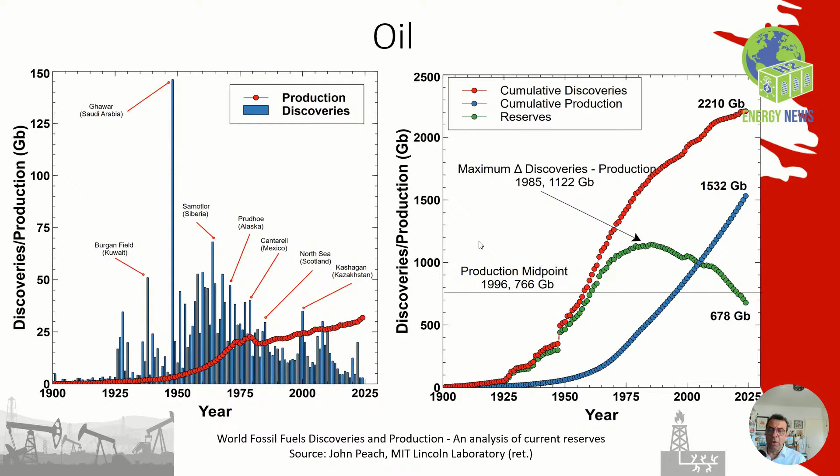In 2016, HSBC did a study, and they found that 81% of existing oil reserves are being annually depleted at a rate between 5 and 15%. So while we're on this plateau, in the background, our reserves are depleting fast and we're not discovering new ones.

The message here is we should seriously think about the after-oil plan, the after-fossil-fuels plan, because there will come a point when oil leaves us, and if it takes 20 years to construct the infrastructure required to replace the oil and petroleum system, we really need to get on with it.

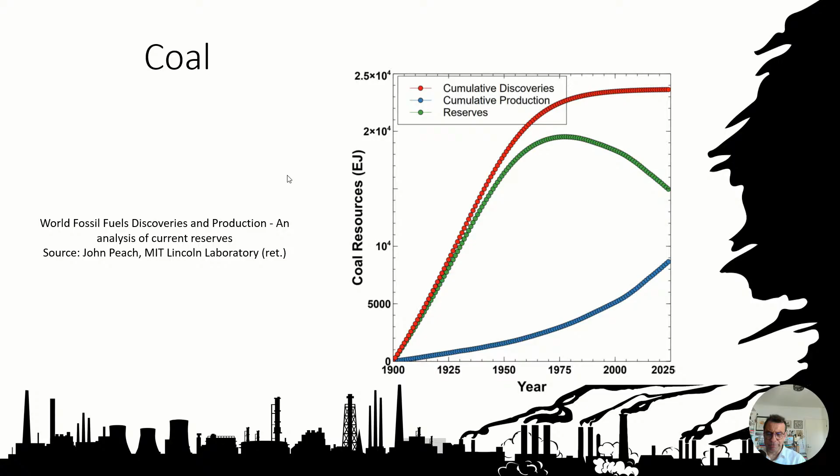The power grid, especially in the United States, is very fragile. It is very complex, and it has built over time in layer upon layer upon layer of complexity. It has almost no resilience at all, and it is an industrial technological marvel that it operates as reliably as it does. Most people don't understand the work that is done to keep that situation going.

So, three quick case studies. 4th of September, Alamosa County, Colorado, in the United States. A very large cloud bank moved in, big storm. That resulted in an 81% drop in electricity for the solar farm that served that whole region.

81%. And they had to source that power from somewhere else, and it was a power shortfall, and they didn't know what to do.

5th of January, Columbia River Gorge, USA. The wind stopped blowing and did not start again for 3 weeks.

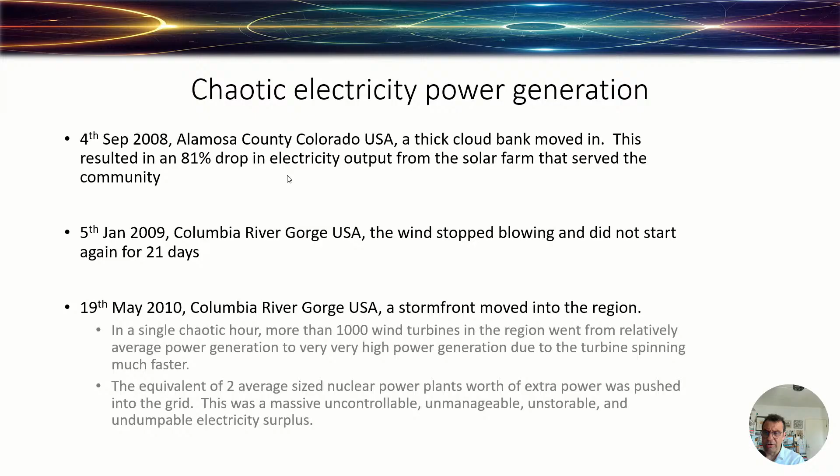Here is that data. So what you're seeing here is the yellow line is demand, and everything else was production. So they had far more electricity than they actually needed. And the problem was solar.

They had more solar, but the solar power that comes in is highly variable, not just in voltage and current, but frequency. The frequency of the power and the VAR frequencies were all very chaotic and outside specification. And not 1, but 2 trip commands came out, and the whole grid just had to shut down, and that set off a cascade, and the entire region shut down.

So the idea that we could have a 3 times build out of solar and wind, and that would negate the need for a storage buffer, was put to rest with this case study. You can have too much power of the wrong frequency, and because we are now subject to the weather, it's all very chaotic.

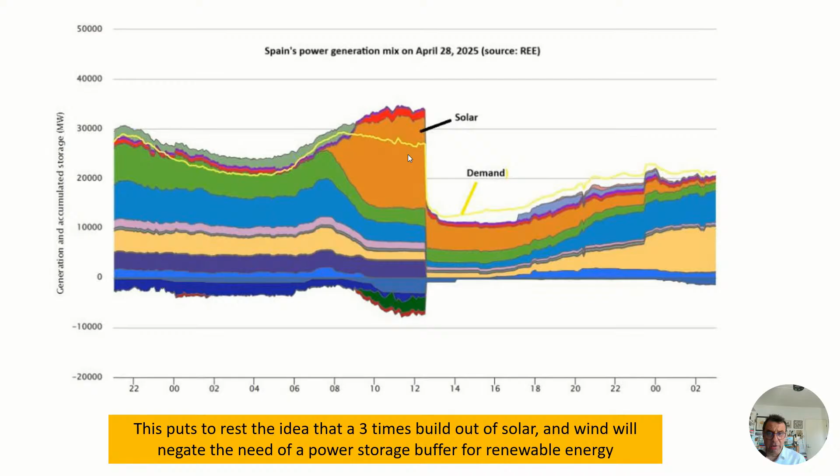Wind, it turns out, is very variable, highly variable, more so than solar. This was a case study I've shown a couple of times. This is Sweden, Denmark, UK, France, and Germany, their wind power all put together. What we're seeing is when one region has a peak, the others do too, but when there's a wind lull, that also extends over a wide area. So you can't use the power from, say, Germany to balance France, or UK to balance Denmark, because everyone's got the same problem at the same time. And there's variations of up to 48%, which are massive swings.

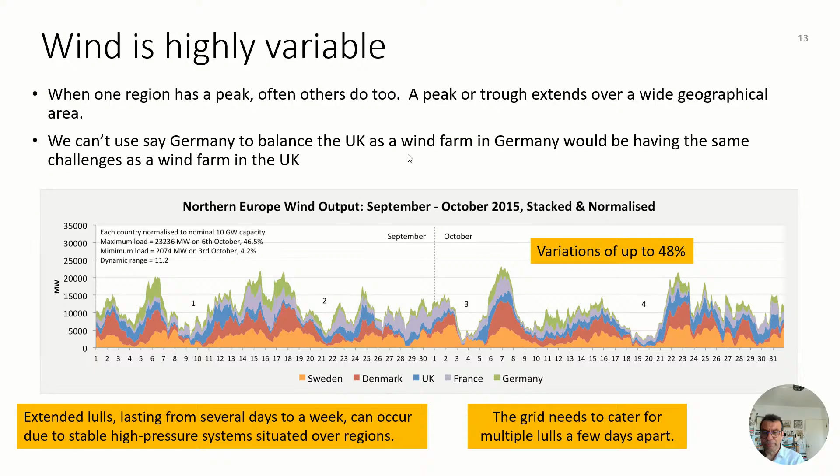This was the 13-day power drop-off in Texas in 2021. In the same year, they had 2 power dropouts, one in winter, one in summer. This was winter - a really severe cold storm came through and a lot of equipment just froze, causing power disruptions. This graph also shows how variable wind is day-to-day, but you see that variation on a minute-to-minute basis too. It really is quite variable. Power generation fell by over 50% at peak times, and the grid struggled to meet demand.

So what they found was, getting a black start going, it was much easier to get gas-fired power generation systems going than renewables. That was the outcome of that era. Every time this sort of thing happens, we all learn something - we all learn what we need to do.

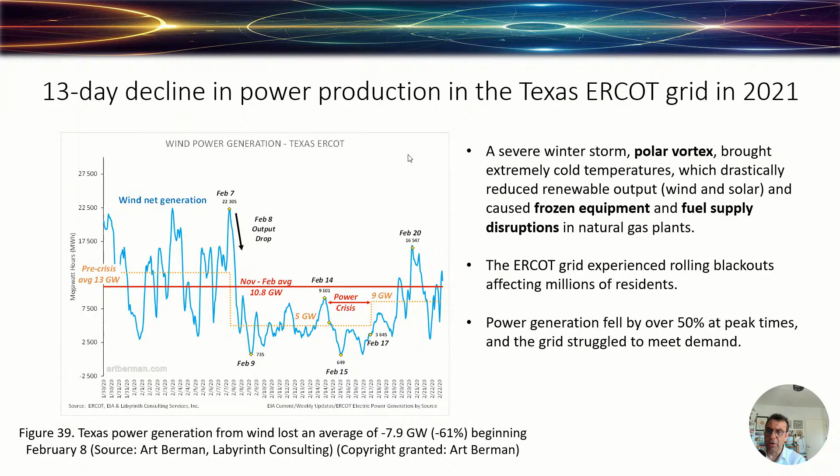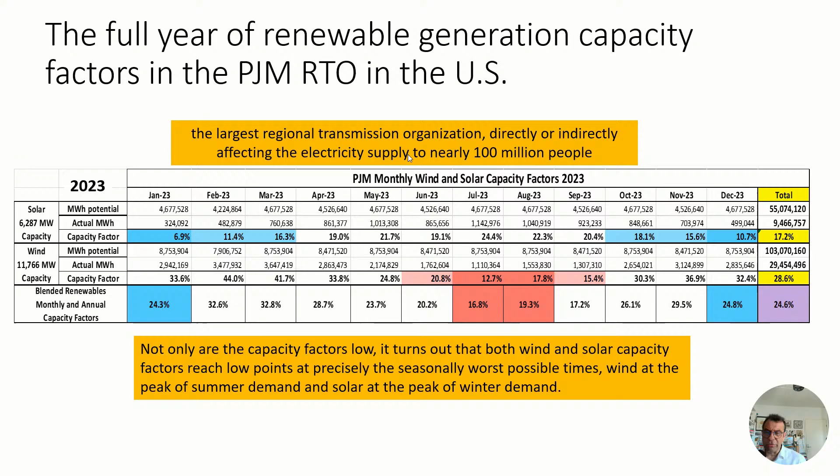So the conventional thinking says 5 to 7 hours of storage. That doesn't get us through winter.

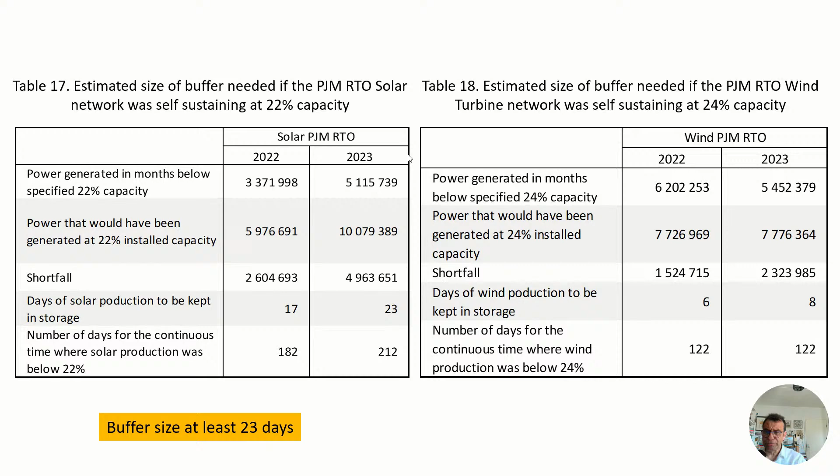Here is that same data, but now the chart on the left looks at wind and solar, as in what power was actually produced, and when. What was the total power produced from these two grids over that time? You're seeing quite a variation, and you're also seeing wind is far more variable than solar - solar is a bit more predictable. So the question is: would it be possible for wind and solar to buffer each other? When the sun doesn't shine, the wind is blowing somewhere - will that help us?

So I normalized the data in the chart on the right to show the power production - how many hours of production per megawatt of installed capacity. What you're seeing here is wind - those columns would have to be close to a flat line if this was to work, and you're still seeing quite a bit of variation. Wind is far more variable, even at the per-megawatt scale, and solar was far more predictable, even though we had less shortfall. There was up to a 29% variation across that when it should be a flat line.

So can wind and solar buffer each other, making stationary storage buffer obsolete? I don't believe so, and that's what this graph is telling me. Also, some of the technology required to make that grid stable and reliable doesn't exist yet, but it could be developed - as far as I know, it hasn't been done yet. This can't work without large amounts of redundancies at this stage.

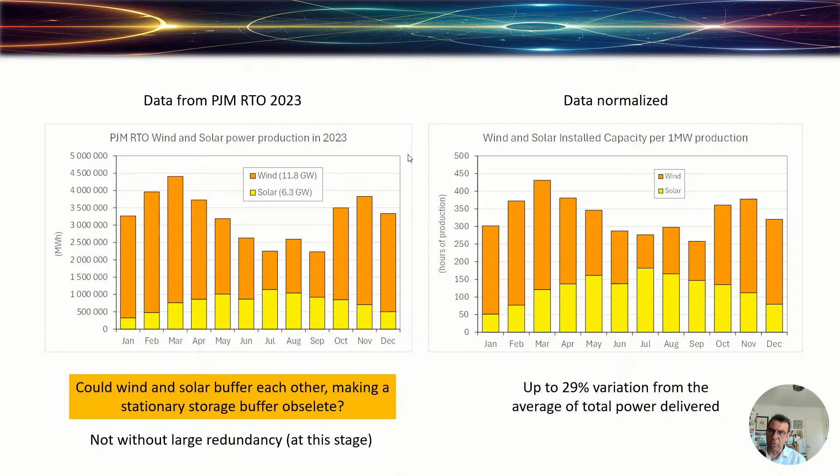So, moving on - this is the work I did in Hawaii. If Hawaii was to phase out fossil fuels, what would that look like? We took data from the NREL site that's actually collecting solar radiance data on the island of Oahu in Hawaii. We then got classifications across the year of what each of the different setups produced - we had 5 different types of solar power setups.

So, okay, what were they? We had domestic housing, like a single-family rental - essentially a domestic house - commercial rooftop, parking spaces, then the arrays: fixed tilt ground mount and single-axis tracker ground mount. So what was their production in terms of kilowatt hours per installed kilowatt across each month for the state of Hawaii? We came up with this data here in the simulation.

Over a 12-month period, we did see a big peak and decline. Now, if this was a standalone system, the dotted line would represent the average production, which would be the contract. So anything above that line could be captured and stored, and anything below that line would have to be brought in from somewhere else.

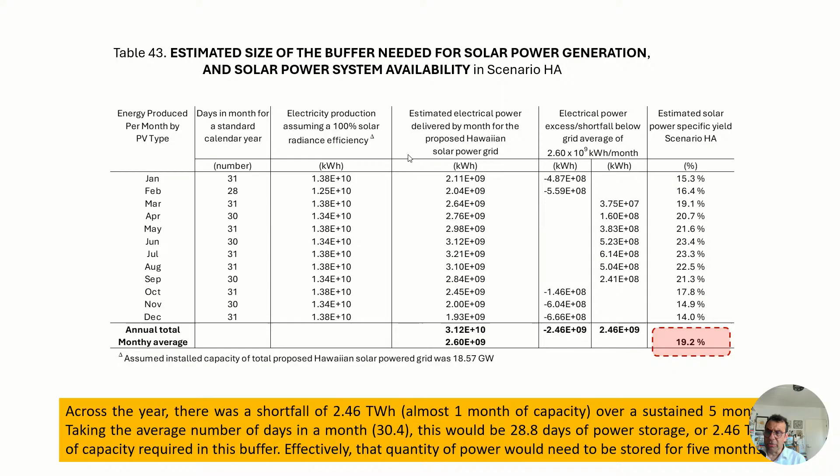This is to show that the idea that 5 to 7 hours is what conventional thinking believes is simply not enough. So the green transition can't be resourced. Wind and solar are highly variable. We're dependent on the weather, which is a chaotic system we can't predict. So a power storage buffer is needed in some form to get through the day-night cycle, to get through the seasonal differences, winter versus summer, and to get through the wind lulls up to 3 weeks. The 3 times build out of wind and solar plus a 6-hour buffer won't work.

To use wind and solar to buffer each other, well, some tech needs to be developed. That's not the end of the world. But in the renewable energy sector, a dunkelflaute, or dark doldrums, or dark wind lull, is a period of time in which little or no energy can be generated with wind or solar. In meteorology this is known as an anticyclonic gloom, which means the industry's got a term for that.

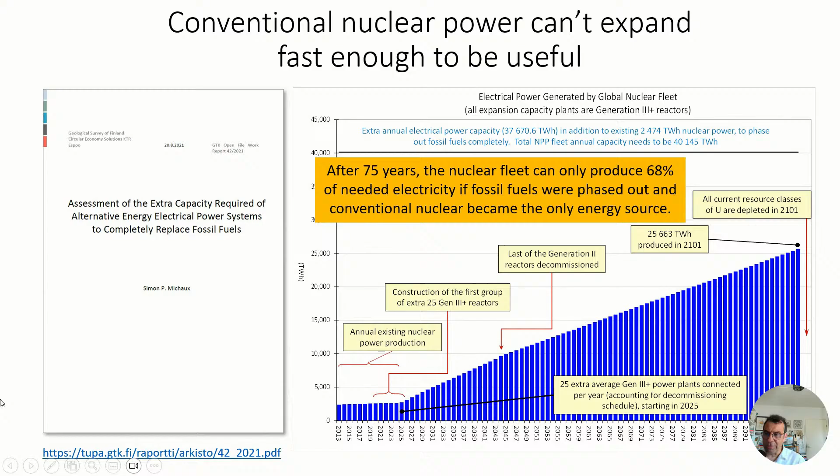So what this is saying, if nuclear was to be an acceptable system, it would have to step in and be viable to supply the vast majority of our energy in 5 to 10 years if we're to make this happen. 75 years, that's not going to happen. We can't expand fast enough to be useful. I'm a supporter of nuclear, but it needs to evolve into something else.

The planet can't produce enough biofuels. This is also the 2021 report. If we were to actually replace gasoline consumption and diesel consumption for the year 2018, and if we were to grow diesel fuel and corn fuel at the same time, the amount of land that we would need is on the left. That amount of land far exceeds any crop arable land that we have, and it's comparable to the amount of forest we have on the planet. The chart on the right is the amount of fresh water we would need, compared to the existing annual freshwater withdrawal. So the planet cannot produce enough biomass to produce enough biofuels for a straight substitution.

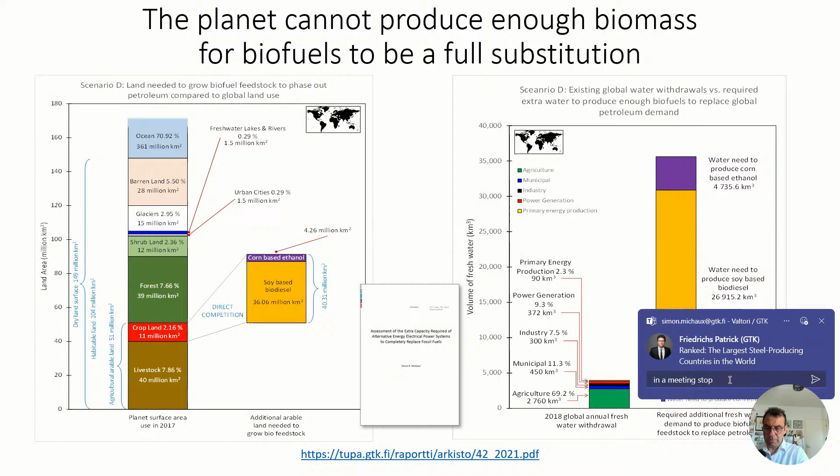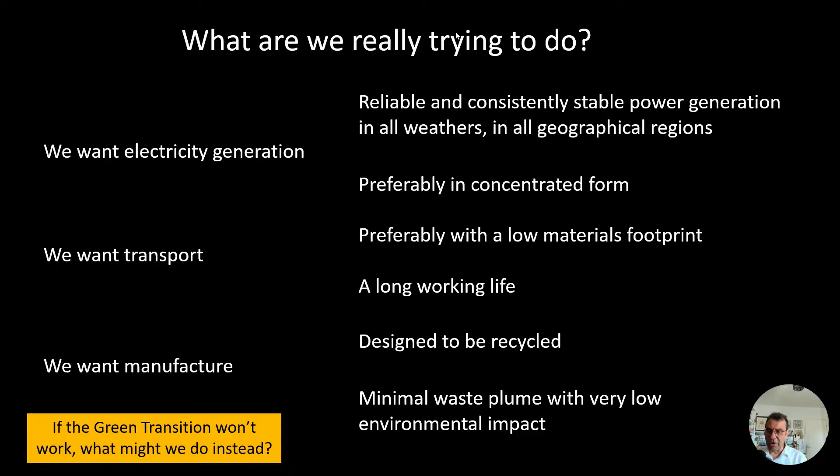So what are we really trying to do here? We want electricity generation. We want transport. We want manufacture. So we want reliable and consistently stable power generation in all weathers, in all geographical regions, preferably in concentrated form, preferably with a low materials footprint, a long working life, and designed to be recycled, with minimal waste plume and a very low environmental impact.

So I propose the purple transition, the resource balanced economy, which at its heart is an evolved and reinvented resource management system.

At the heart of it is thorium-fueled generation for small modular reactors. There are now two technologies on the books for this: one is the molten salt reactor, the other is the pebble bed reactor.

More on that later. Electric vehicles, but powered by different chemistries, non-lithium chemistry, for anything short range, less than 100 kilometers - that's what we need. Combustion of iron powder as the thermal fuel, which will be a replacement for coal.

Pyrolysis of human sewage: we take human sewage and heat it without oxygen, and that becomes syngas. That syngas can be used as domestic cooking fuel, or we can recycle the combusted iron powder - it's a recyclable fuel. Ammonia-fueled internal combustion engine technology for our long-range transport.

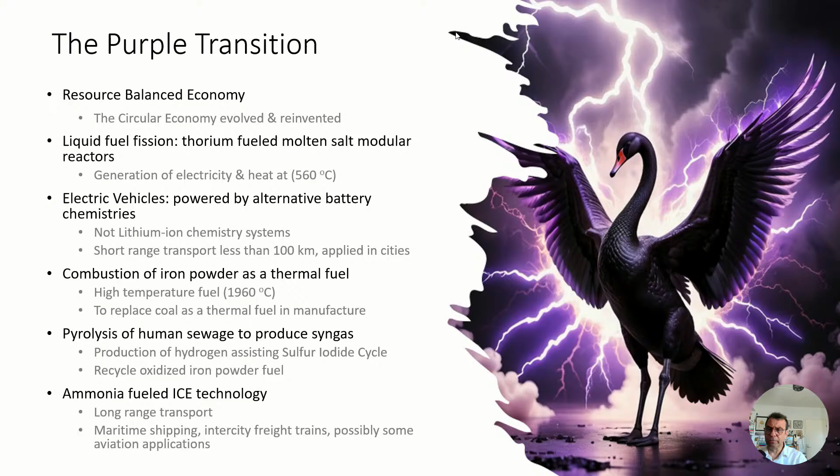There are a couple of other things as well. For energy systems, we want a non-fossil fuel paradigm that allows decentralization, simplification, and contraction in size of the industrial sector. So this is the molten salt burner.

This is the molten salt burner. The thorium takes the form of a salt, thorium and fluoride together. It's not radioactive at the beginning, and its hazard sheet says don't get it wet so it doesn't dissolve. It's put into the reactor, and they have a neutron source to bombard it, and some of the thorium is transmuted.

It's transmuted into uranium-233. The uranium-233 is hot, it melts the salt, it turns into a liquid, and then it moves around the circuit, exchanging heat. That heat is then used to turn water into steam, which turns a generator, which generates electrical energy.

So this thing's already liquid. The fuel can be exchanged and cleaned while it's still operating - it doesn't need to shut down. If it gets too hot, you've got a freeze plug and the fuel just drains out of the reactor into separate dump tanks, and can be dealt with elsewhere.

Also, through a process called the Doppler cascade, if it gets too hot, the neutron economy will cascade over the top of itself and shut down. So there's not one, but two things to stop it from melting down. This is inherently safe, and it's not going to produce something like a Chernobyl or Fukushima accident.

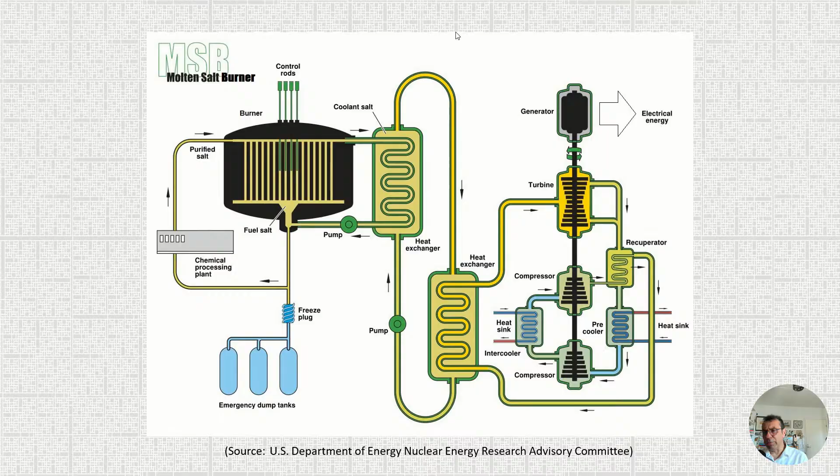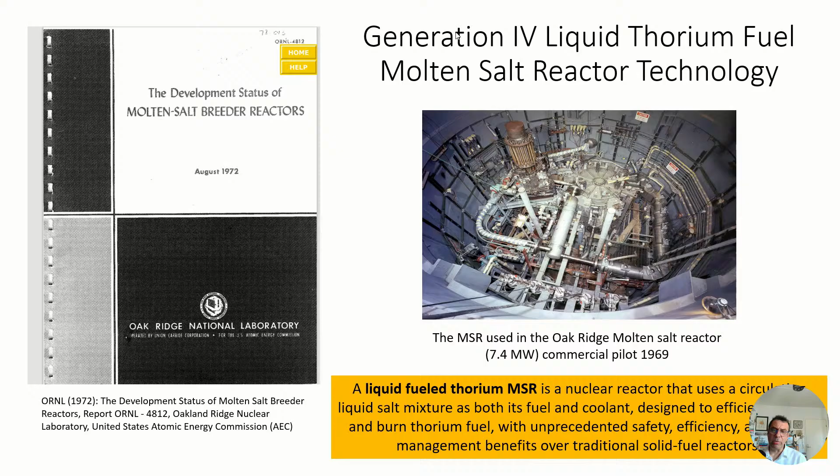In 1972, they had a report where molten salt breeder reactors came in, and this report showed it worked. They were asking for funding to actually extend it. This is the picture of their system that they were working on. It was 7.4 megawatts, and it had 6,000 hours of uninterrupted power generation without a problem.

China is actually already commercially using this power. The liquid fuel thorium reactor of 2 megawatt size is in the Gobi Desert and has been commercially selling power since 2022. So this is not a theory - the technology is out there running, and it's in the commercial world already.

There are multiple systems in China. I'm going to present you with two of them. I went to Europe, Copenhagen. Copenhagen Atomics is making a factory that will produce these, and they'll be producing at this stage by 2028, if all goes well. Their system is 100 megawatts of thermal heat, or 40 megawatts of electricity.

It's a modular system where they can stitch as many of these things together to construct a range of power capacities. Each reactor is the size of a 40-foot shipping container. Electricity will be sold at a projected 2 cents a kilowatt hour.

One gram of thorium or uranium produces 24 megawatt hours of thermal energy. So a plant producing, say, 1 gigawatt of electricity will consume 800 kilograms of thorium-232 in metal salt form each year.

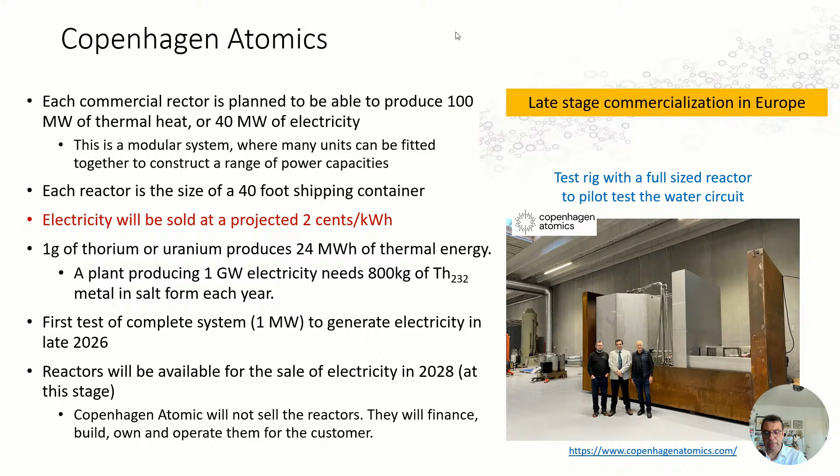It's the size of a shipping container and arrives on a truck. When it's installed, they'll mount 50 years of fuel in it, and they have a 5-year maintenance cycle where they come in and strip out corroded parts and maybe even clean a bit of the fuel. Then when the reactor is done, they take it away and replace it with another one. That system produces 40 megawatts of electricity.

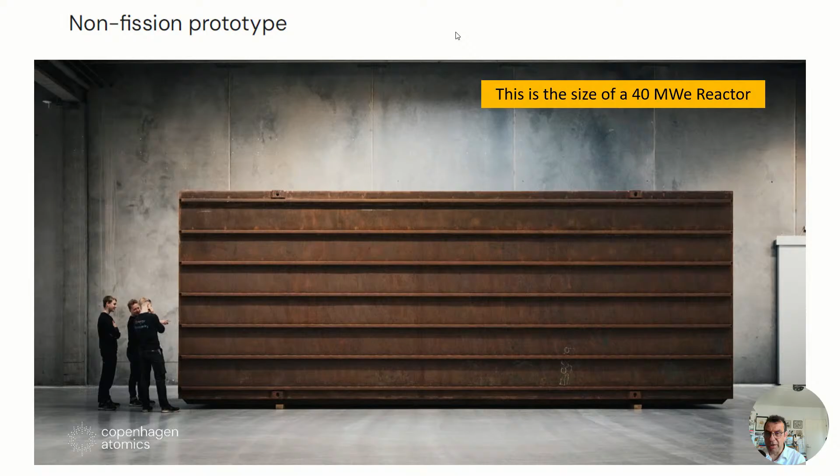It's an isotope of U-235, which naturally is about 0.7% of natural uranium. The enrichment process takes it to about 4%. So each of your fuel rods has pellets in it with only 4% of useful fuel. So when that's depleted, they've got to take it out and put it in storage. The vast majority of what goes in is not useful.

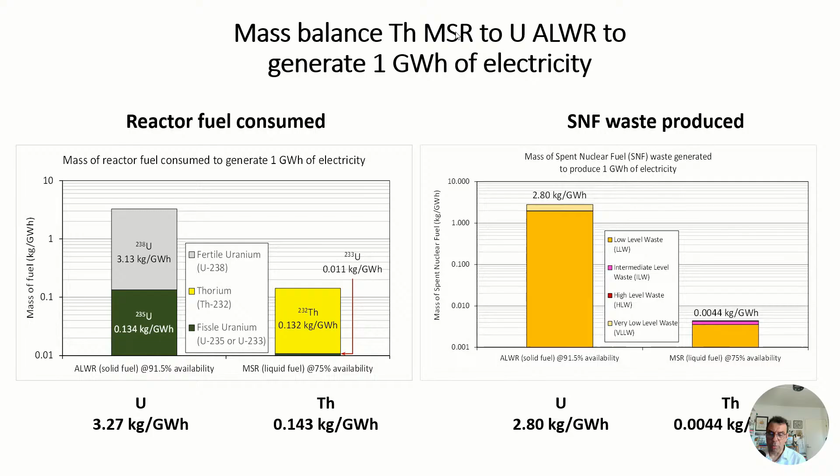For thorium, every single atom of thorium is used. It's transmuted to U-233 and it goes through the process. So reactor fuel on the left, spent nuclear fuel on the right. We've got an order of magnitude difference in the amount of spent waste. So this is a much simpler system.

There's also the problem of shielding. The stuff on the outside will shield the stuff on the inside. So it's not a very efficient use of fuel.

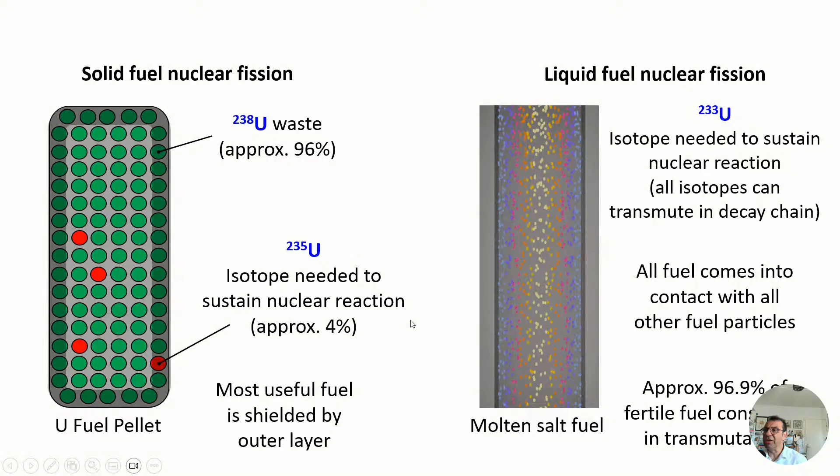So if we're in the situation here where fuel's moving around and there is no shielding, it doesn't matter if fuel stays in there a bit longer than normal—it doesn't actually stop anything. So what this means is we can actually, over time, put small quantities of spent nuclear fuel into a molten salt reactor and turn it into useful fuel.

This is a solution for the nuclear Achilles heel of what to do with the spent nuclear fuel. This is such an opportunity.

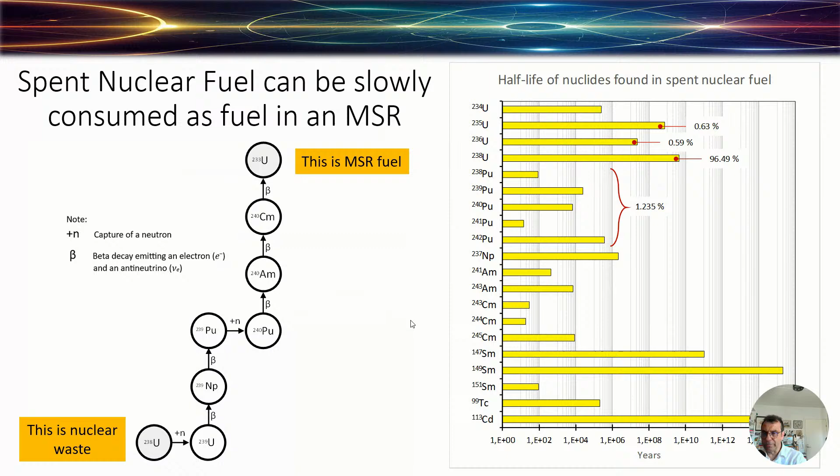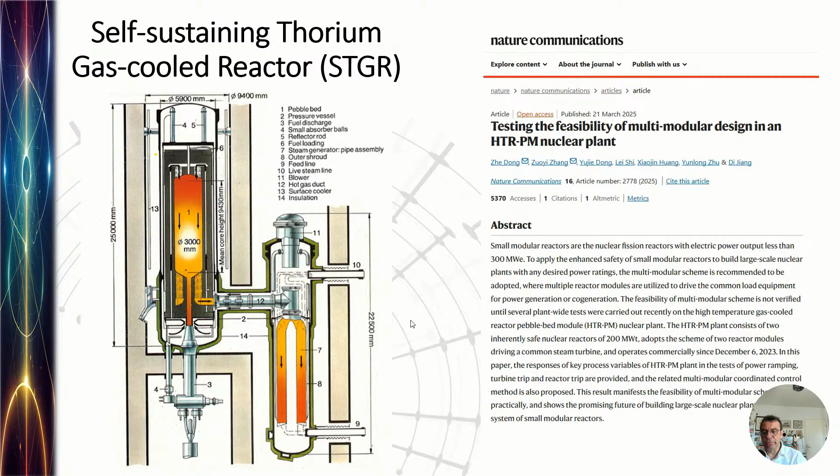So what this is, you've got your fuel. Your fuel is like, say, 0.5 millimeter in size of uranium or thorium. It works for either. We coat it with a series of layers, and it becomes what's called a triso fuel element. So they coat it, and the final pebble is about 60 millimeters in diameter.

This is important because solid fuel thorium, when they tried it in India, it worked, but the problem was the fuel particles got corroded on the surface, and they had to take the fuel pellets out and dip them in acid while they were still very radioactive, then put them back into the reactor. While it was doable, it wasn't worth the hassle, because uranium was a better fuel when it actually came down to it. This solves that problem, though—the surface doesn't corrode, and all the thorium can actually be consumed as fuel. So it's a very simple system.

It's a tall cylinder. You have a pebble bed with the pebbles.

Pebbles are dropped in the top, and over time they're used. Out of the bottom they take them out every now and then and examine each pebble to see if it's actually been used or not. If it still has useful thorium or uranium in it, it's put back in. If not, it's sent off for recycling.

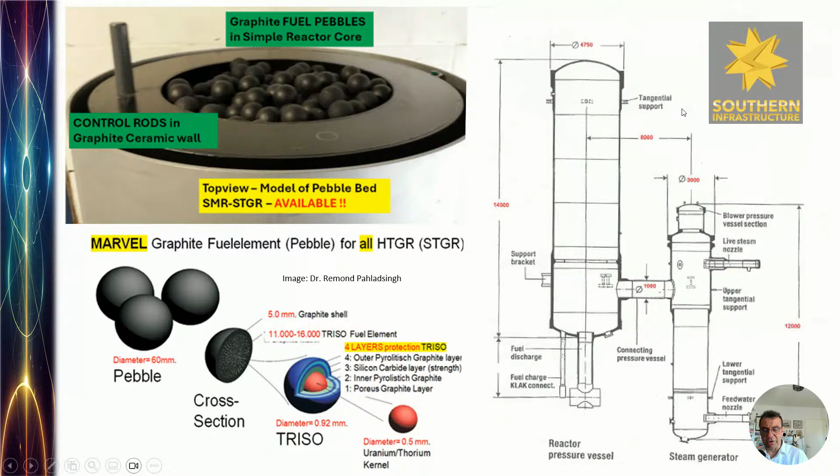So that 900 degrees turns out to be a threshold, and all sorts of things are possible. The sulfur iodine hydrogen production process requires 900 degrees, and it was previously rejected because supplying that kind of heat was a problem. The other thing that interests me here is these are small enough to be deployed in a shipping container, and they've got a 24-month factory build.

This system is safer again than the MSR. With the MSR, you've got a hot liquid at high pressure moving around the system - if you have a crack in a pipe, you've got hot liquid spraying out of that crack. There's a lot of engineering done to prevent that, but this is just a pebble bed. There's nothing to leak, nothing to melt down. It's inherently safe.

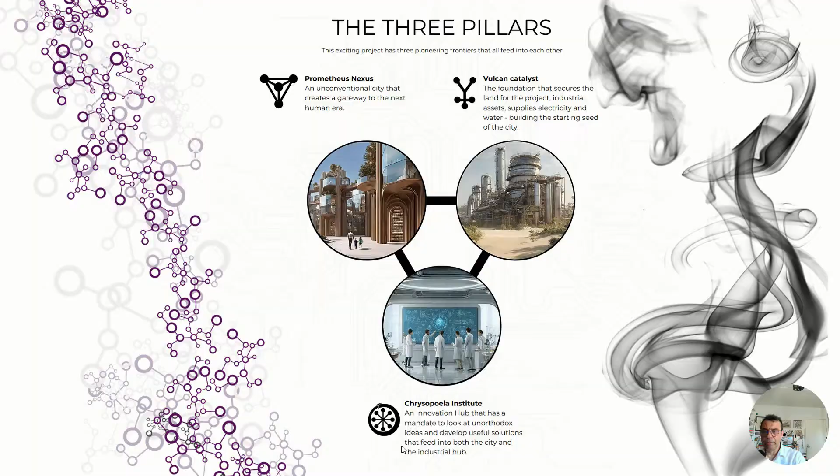What we're trying to do is inspired by Jacques Fresco's ideas. He founded the Venus Project, which is still running at thevenusproject.com - I recommend people go have a look at it. I read his writings, never met the man, but he was clearly a genius. I'm paraphrasing, I listened to a number of his presentations of what the future could be.

So what is our paradigm behind it all? If we were to design a human settlement, let's call it a city, and use the best science has to offer, but also optimize the whole city to the well-being and quality of life for the people who lived there, what would that look like?

When I was researching the energy grid and its history, it was very apparent it evolved over time in layer upon layer, a Frankenstein system that was terribly inefficient, but people were completely helpless in doing anything about it. But if they were to design an energy grid from scratch, build the whole thing whole cloth in a greenfield context, it would be very different.

I think this is the case with all our technology, including how we design our cities. So this is a new paradigm for how we might live - an evolution of the existing industrial society, powered by an unorthodox, mature energy source, operated to a new resources management paradigm, which is what I'm now proposing. A more responsible relationship with the planetary environment is what we're after.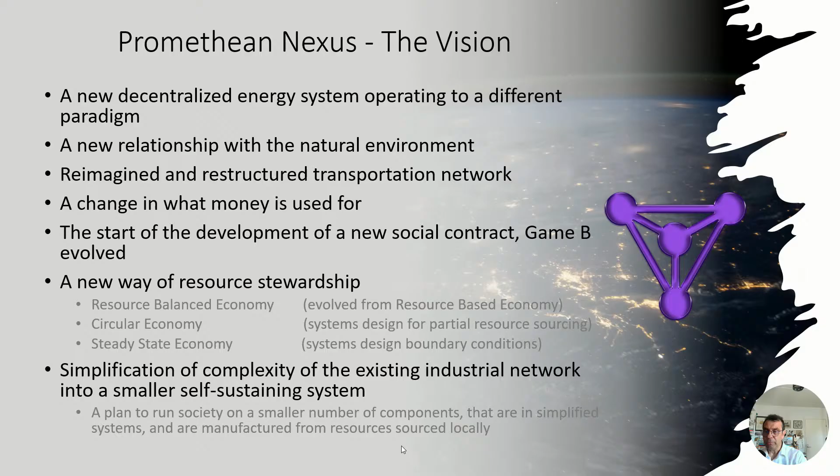So we want to develop a comprehensive plan for social reclamation in which human beings, technology, and nature will be able to coexist in a long-term, sustainable state of dynamic equilibrium. That's another Jacques Fresco quote. I would have liked to have met that man.

And that brings us to Vulcan Catalyst - this is the other aspect of this project. It's an industrial project that will raise revenue through the sale of cheap electricity, cheap diesel fuel, and the production of graphene products. We want a self-sufficient industrial innovation hub. We're going to produce electricity

using thorium-fueled MSRs, but also thorium small modular reactors, and possibly a uranium-fueled system as well, in what I call reactor park. More on that later.

As we're generating that electricity, we are taking water from the sea. That's important because every region we look at now has possible drinking water shortages, or at least the area I'm looking at in particular. If we can work out a way of having all our water needs taken from the sea, we're not in competition with the locals for their own drinking water at a time when there's not quite enough to go around. I'm talking about the coast of South America.

So I'm going to talk about this later, but we take water from the sea, we desalinate it using heat from the reactors, put it through the turbines, and then we capture that steam, and that's our drinking water.

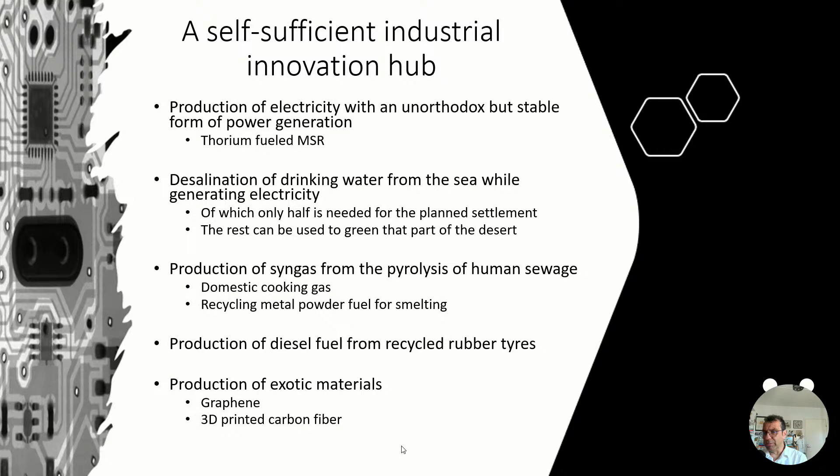Approach a locally positioned company, like a mine site, that needs a large amount of energy to function. A mine site needs something like 50 megawatts of power supplied sustainably, and they're having real troubles trying to do that with renewable power.

Get that corporation to request the local government to create what's called a regulation sandbox. In that sandbox, we will do a number of research actions. This will be a partnership between the corporation, Vulcan Catalyst, and the local regional government.

We want permission to construct and operate Generation 4 small modular reactors fueled by thorium and uranium. We also want permission to construct and trial innovative building materials like geopolymers.

Once we get that regulation sandbox, we set up Reactor Park. This will also help us secure the land. This will be part of the deal.

Once we get Reactor Park up and running, operate 3 to 5 small modular reactors of different technologies—thorium and uranium, but I prefer thorium.

Sell some of that electricity being generated and heat to the mine site. Use some of that electricity and heat to produce saleable products from primary and secondary sourced materials. This is actually using the principles of the circular economy. Can we valorize the waste streams around us? The answer is yes.

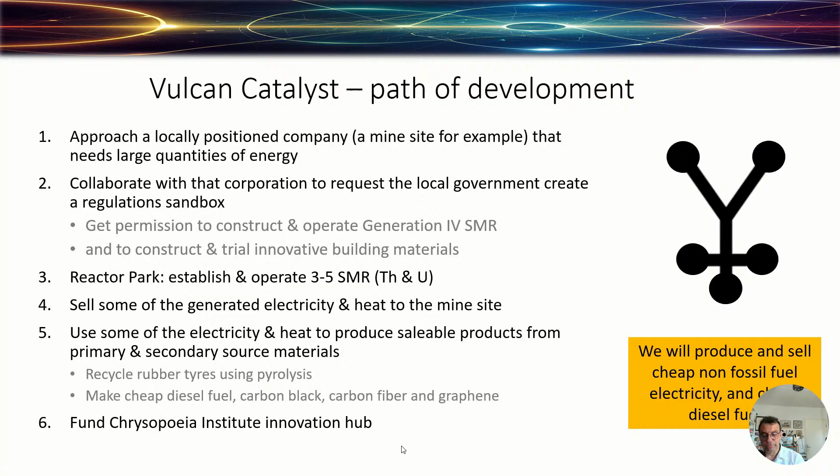As time goes on, we will start small with one or two operations. But as revenue comes in, parallel operations can start up in a revenue generation context. A new system can be brought online that will be able to generate revenue, and it will all balance.

But each of these systems are optimized where the outputs of one are fed in as inputs to another. This is actually what I call industrial permaculture. We end up with a constellation of maybe 30 pilot plants, industrial pilot plants, all optimized together as one large system.

And this is what I call industrial permaculture. More on that later.

What are the implications of a small industrial site that produces metals, possibly bioplastics and ceramics, possibly glass, from primary sources right next to it, and has state-of-the-art 3D printing, CNC, and pilot-scale smelting capability, where electricity, thermal heat, and potable water are available in quantities?

So what we've got here is, over time, we will build this. It will start small and simple, and as more money comes in, we'll develop more things. So the people who invest in this will get their money back over a 5 to 10 year time frame.

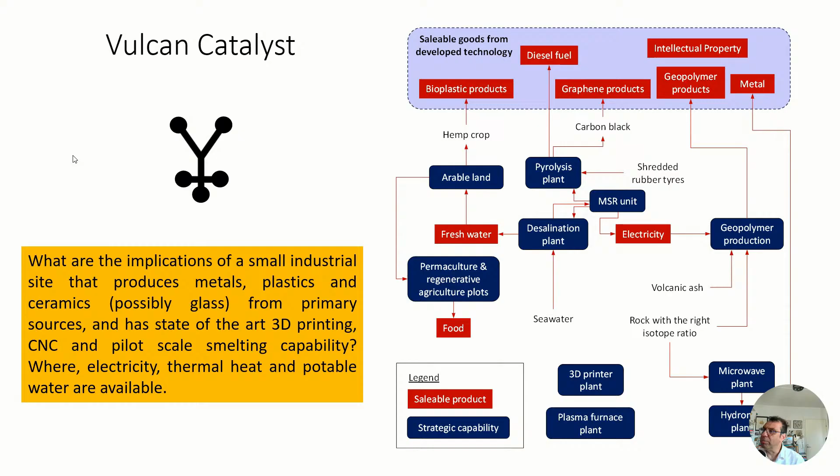There are two sites I'm interested in, one in Peru, one in Chile. I've approached government authorities in both areas. They both find the idea interesting, but there's a lot of discussion about whether it's practical or not.

So now we're talking about a mandate to look at unorthodox ideas. We need an innovation hub, and we need to test some of them at scale. What you're looking at here is the testing, the physical demonstration of a number of ideas and prototypes. We are not only going to make money out of this, we're going to demonstrate that they are real.

And that brings us to Chrysopoeia. So an innovation hub will be funded and founded as part of the Vulcan Catalyst project. This will be a hub with world-class capability that has a mandate to assess unorthodox ideas and then formalize them into a useful form. So we're going to take ideas across eight frontiers, and eventually we'll prototype some of those ideas into technology.

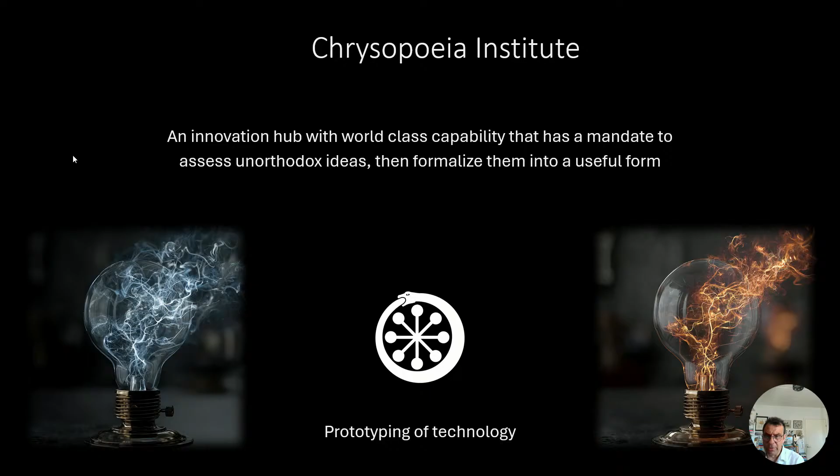So there'll be IP flowing off this hub. Some of that IP will be public domain, and some of it will be sold, depending on what it is. These are the frontiers: life systems and earth systems, social science, holistic health, energy in all its forms—particularly electromagnetic and electrostatic—nuclear atomic science, materials, manufacture, and also the understanding and use of AI.

Chrysopoeia will work on these frontiers to facilitate breakthroughs to allow our industrial society to transform into a more long-term sustainable system. Each of the things you see on the list is there for a reason. Once we have the breakthrough, we will use it. That's why it's there.

So this was the original mind map I put together. It's a little on the small side, sorry about that. Each division will facilitate a breakthrough in how we do things. Each division will have its own laboratory, sample storage, office, library, and database. All divisions will be organized so they can interact with other divisions.

One of the things I want to look at is energy—the true nature of energy. I think we only partially understand what energy actually is, and also what heat actually is. We have an understanding up to the point where we can predict what it will do, but we still have yet to get to the bottom of the rabbit hole.

So there's a whole lot of things, and there's an interface between energy systems and life systems. So I would like to look at that in some form.

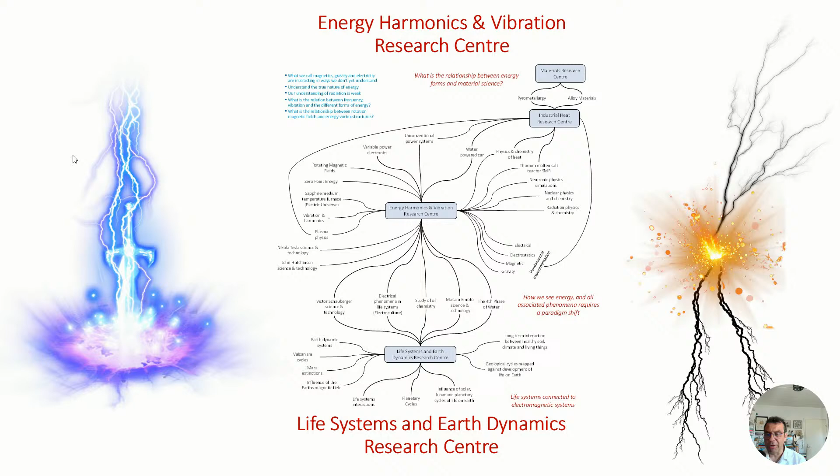There are three basic wings to the project. One is industrial evolution, the other is a new relationship with the environment, but the third is development of a new social contract.

We will found a game theory laboratory. Now, this will be asked to test a number of things. We will discuss and debate a whole series of ideas for a new social system, where we use money differently.

And I want that debate to get to the point where we can actually turn it into a practical system, then we can game theory it. I want it tested over a 500-year time frame to see what is required for a stable system to be in operation. And that's the job there.

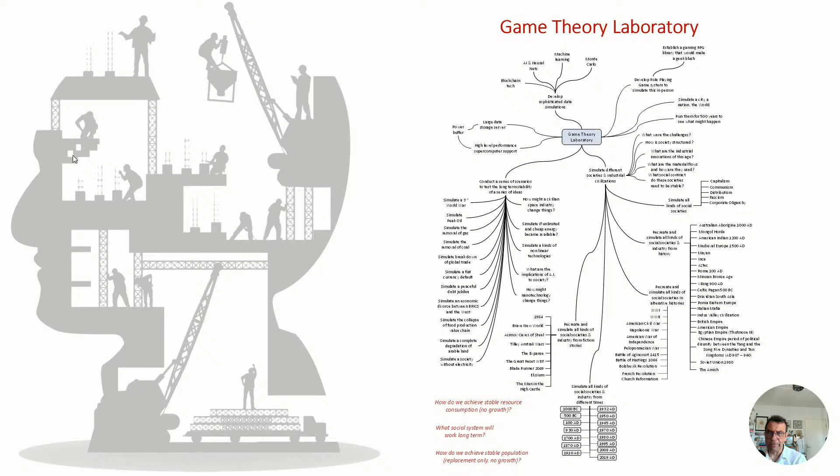So if we're pulling water from the sea and desalinating it after power generation, we're going to capture that steam into water, freshwater systems, and then irrigate it back down the hill with drinking water for the city, water for the industrial constellation, and about half the water will be available to run an agricultural belt and support biosystems.

Step 2, Chrysalis. So we start fundraising, and during that fundraising we will discuss with a number of sites, visit a few of them, and end up selecting a city site.

Third step is innovation, although in practice innovation already started. We're going to be collecting innovative ideas through the website posted earlier, and make a database, an ideas portal, where these ideas are accessible by everyone.

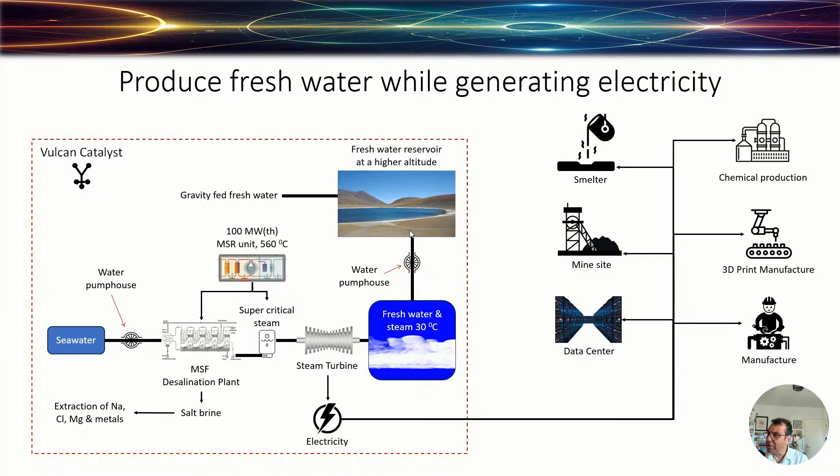That steam on the other side of the turbine has dropped substantially in temperature, but it's still steam. So we pump it uphill. The area I like is along the South America coast - a coastline going up into the Andes, so there's a slope. Heat likes to rise, so we can pump it uphill and capture it at a higher elevation into a reservoir, mineral balance that water, and after it's cooled and useful to support living things, irrigate it back down the hill in gravity fashion into the areas we want. In the mass balance, the industrial systems we're planning represent maybe half of the steam we would produce. The other half will be for the agricultural belt, but also to support biosystems around the city.

So this is the multi-stage flash unit. Again, this is pretty standard, off-the-shelf stuff. It's not quite as economical as other methods of desalination. It's used in places like Saudi Arabia where they've got plenty of energy, and we'll be in that position as well. I like this idea because I want the water - it's not just the energy I want for drinking, but I want to be generating energy and water at the same time.

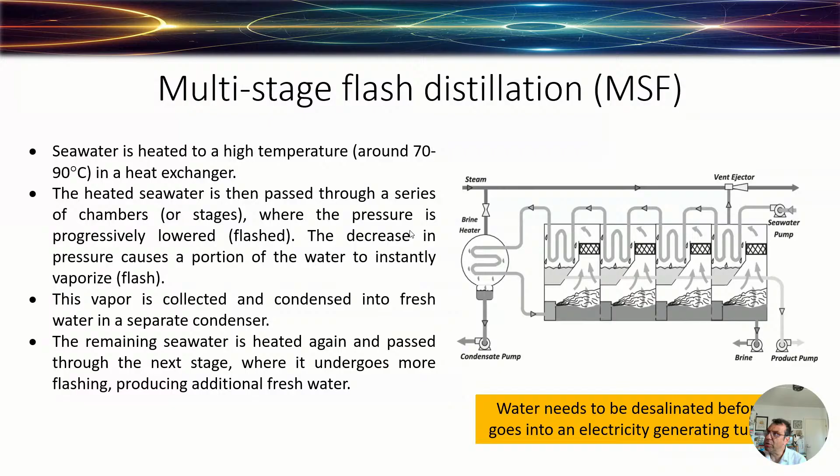So the map looks like this. Take seawater, turn it into brine, put it through a solar still where the rest evaporates out, and so you've got either straight sea salt, which can be used as a geopolymer, or salt turns out to be the starting point for a lot of chemical reactions. So it might be useful just as it is.

Or do we extract individual salts, or do we break it apart and extract the actual metals? You often hear things like there's plenty of lithium in seawater, plenty of lots of metals in seawater, trace elements in particular. Well, now's the time to extract it. And that's how we do it. So by the time you get to the end of it, there's almost nothing left.

So when you take seawater and desalinate it, other plants around the world dump vast amounts of salt back in the sea, and that's a problem. Here, we're going to take that salt and we're going to use it. And the mass balance - nothing is returned to the sea.

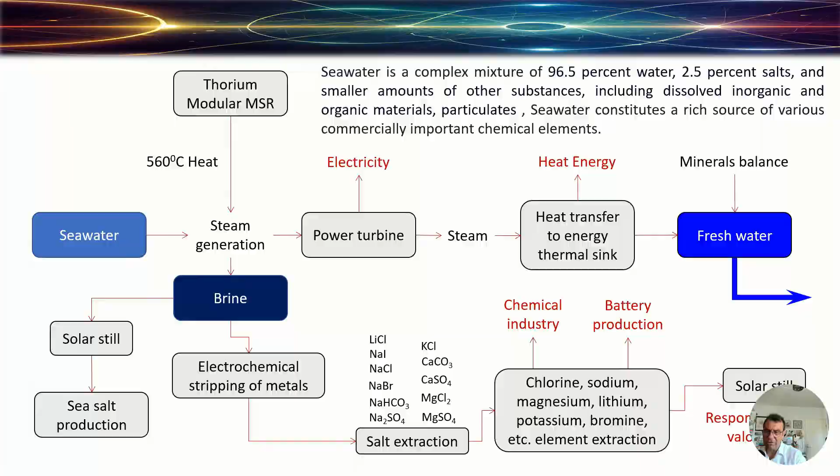So it's going to look something like this. Here's a patch of land somewhere along the coast of South America. An animation, sorry about that - it seems to work. Let's drop the city there. Our industrial constellation is outside the city. We've got a thorium molten salt or a pebble bed reactor there.

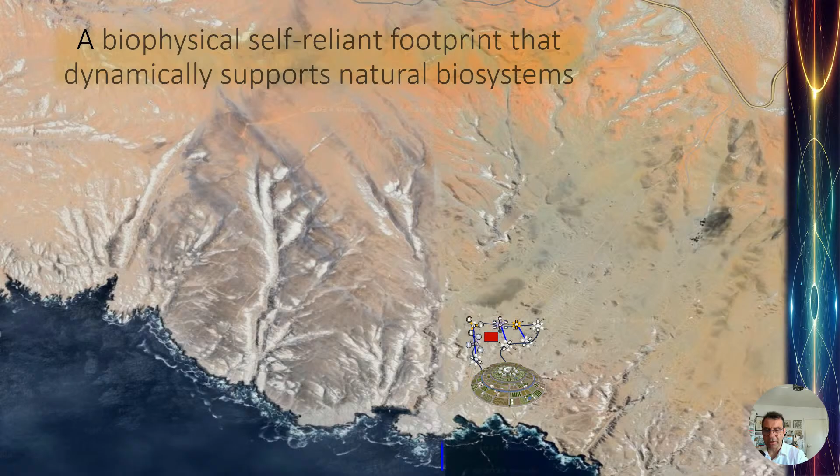We're pulling water from the sea. The steam then goes up to a series of reservoirs at a higher elevation. And then water is irrigated back to the city for our drinking water and to run agriculture. There's our industrial needs.

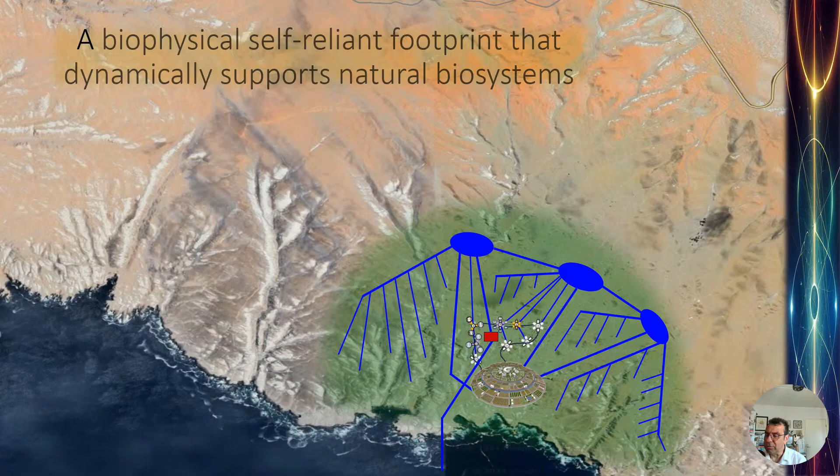And something like a third of the water left can be used for other things, for example, making a green oasis around the city. Now remember, this is a patch of desert where it's very dry and there is not a lot of water around. And so it means we can actually generate fresh water regardless of whether there's a drought on or not, and regardless of what population needs for drinking water around. We're not in competition with anyone else for anything.

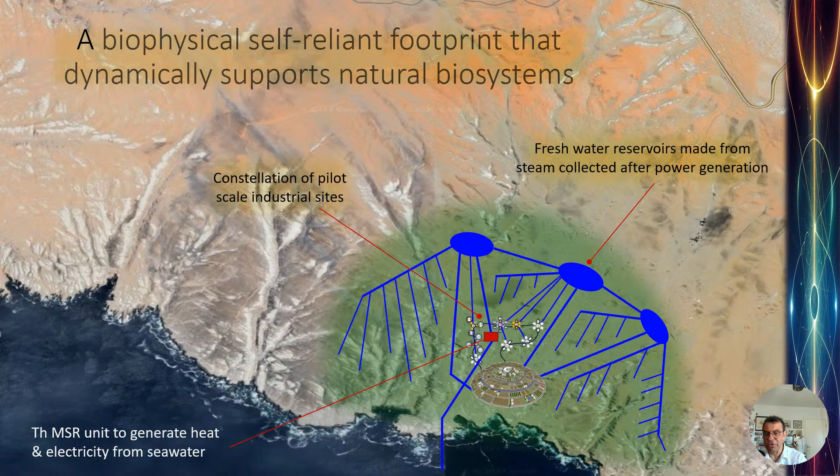Right, so now I'm going to talk about the power grid. I was talking before about the power grid in those books I was reading. Our current system is very fragile, and it's not very resilient for anything. And even a small setback is enough to cause a lot of damage. So I'm proposing a 3-tiered grid, and this has been designed for resilience.

The primary power grid is controlled. This is the thorium network - this is reactor park, 3 to 5 small modular reactors, molten salt reactors, whatever we can get hold of. It will power the industrial clusters, but it will also power the city.

6 megawatts, which is very little - a single wind turbine is 6.6 megawatts now. But 6 megawatts reliably supplied is what we need. 70 megawatts is around what we need for the full industrial setup when it's fully formed. Initially we will need maybe 4 or 5 megawatts.

Supply the city, supply the industrial constellation, and what I'm asking to have here is a battery bank with a buffer of 10 minutes. Its purpose is to balance whatever's coming out of these reactors and balance what the city needs. Is it 10 minutes, is it 60 seconds - whatever it is, it's going to be an interface. This will solve right there and then all the problems with the variable voltage problem. We also have a control hub and a diesel generation for black starts if for whatever reason that happens.

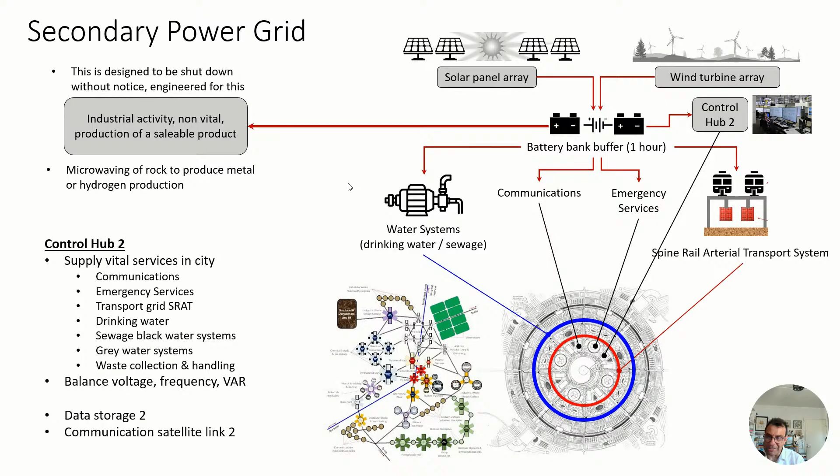The tertiary power grid is resilience, a backup on domestic housing. So now we've got solar panels sitting on some domestic houses and some buildings in the city. It's managed from Control Hub 2.

Now, what the key here is whether each house or each building connects to the power grid is up to the occupant of that house. There's a great deal of trust that has been damaged in society at the moment, where a power grid's managed remotely, and they'll do things like turn off your air conditioning or turn off your power consumption remotely, whether you like it or not. The tertiary power grid is so everyone can be close to being self-sufficient within reason.

And they choose to supply power to the grid or not. So this requires the community to actually engage. This is to actually provide resilience, and the amount of power that's running off the tertiary grid is the final backup if everything goes sideways.

This is based on the Maslow hierarchy of needs. And what would a household need? If our cooking gas is syngas, then food storage, refrigeration is probably the big ticket item, and if we're in an area that doesn't need heating, we need communications, access to drinking water, functional sewerage, food storage, heating if needed, but it's not needed in this location, and cooking, well, we're going to use syngas for that.

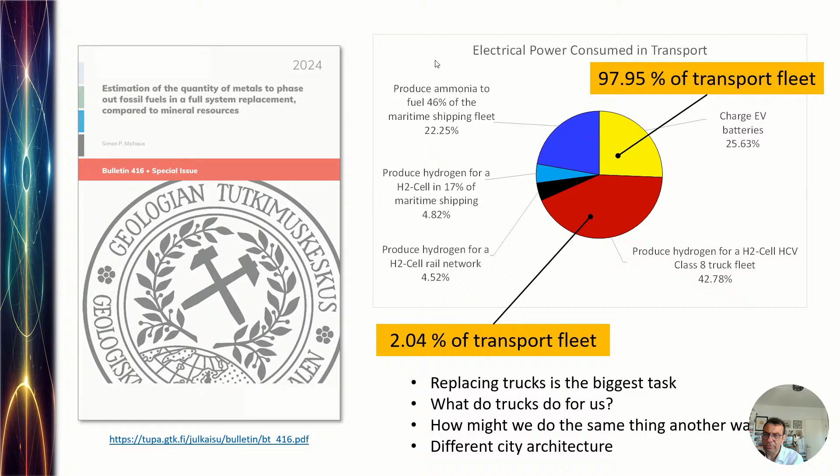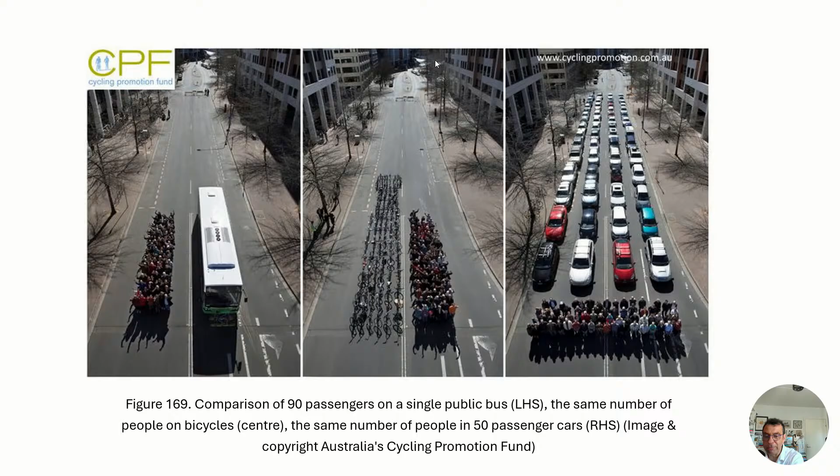So then I started looking at this, where, well, this was a study that did a comparison. If you had 90 people in a bus versus if they were all on bicycles versus if those 90 people were in 50 passenger cars, how much footprint would they take up? And then what I'm proposing is this.

We will have what's called a spine rail arterial system. So you have a framework, and on top of the framework, we have monorails to move people around. On the bottom of the framework, we have an underslung cargo system that can move pods like shipping containers. This is to replace some of the road traffic, not all of it. We still need trucks and buses and cars for flexibility.

But what I realized is the transport for trucks that would be linear - there'll be a lot of trucks going down the same route between, say, especially the heavy trucks, going between a shipping port and a distribution center, and they'll be just running back and forth, back and forth. If we had one of these systems on that route, we could actually cut out a lot of traffic.

What it would mean is the transport sector would have large chunks of that sector would now be directly powered by the thorium reactors. We don't have to have standalone systems with tanks of hydrogen.

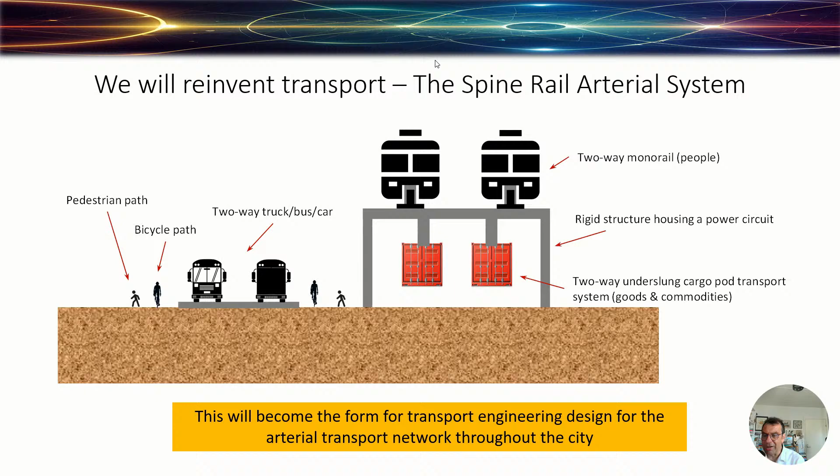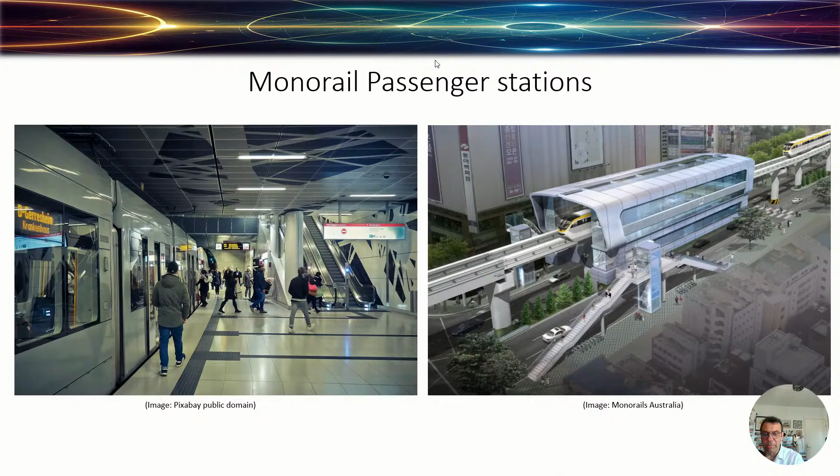We know how to build monorails and metros, they're all over the world. So if we had one of those, but here's the innovation: a group in Nigeria called Futran had the idea of transporting skips of ore from a mine site out along an 80-kilometer track to a shipping port, and this was really, really cheap.

When you build a railway line you've got to have a lot of civil engineering, making sure the tracks are level, and it's really expensive. This, in comparison, is just a series of metal struts that can go over any terrain, so it's much, much cheaper to put on the ground.

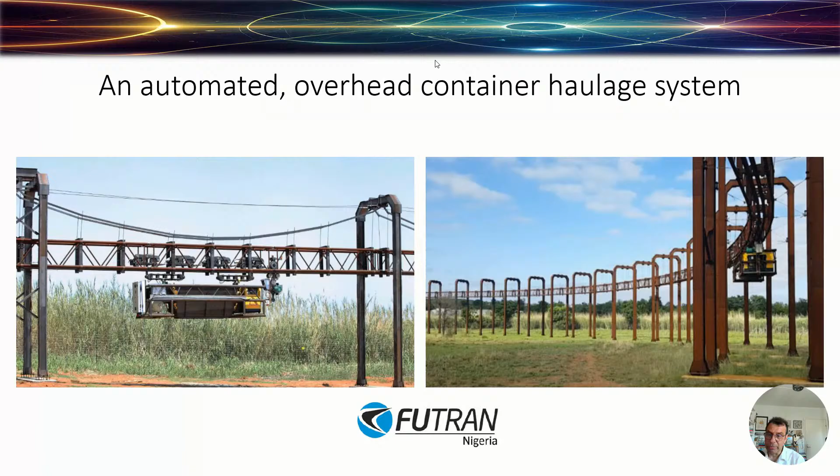The metrics are as follows: on the left, distance per capita, electric consumption per capita, for electric vehicles versus a hydrogen fuel cell bus per passenger, versus if we were to put them all into a monorail of average size - there's quite a drop in energy consumption. On the right is the hydrogen fuel cell truck versus an underslung cargo pod system in kilowatt hours per kilometer for cargo.

So we're moving people and we're moving cargo, and the cargo is especially important if we go between different industrial hubs where we want to move industrial goods around between nodes.

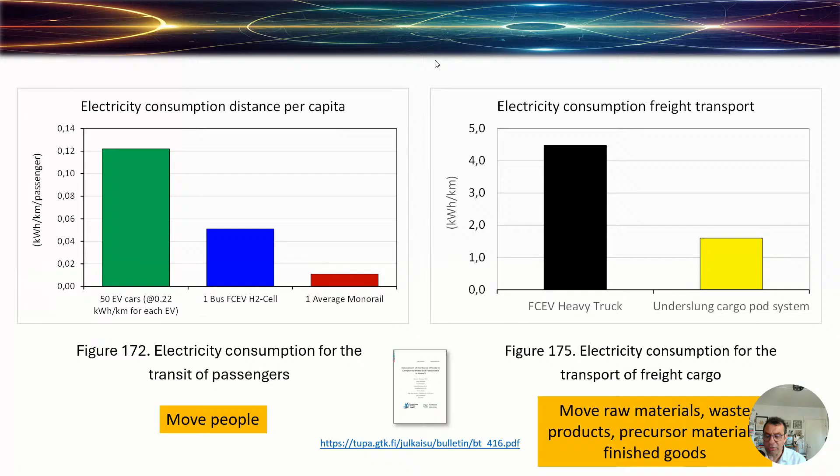So in this report we've got the green transition. If we were to do it normally with the electric power grid versus doing it this way, we've got a 32% decrease in total power demand. The amount of power saved is 32%, and this was the point of doing it - almost a third of our power could be dropped.

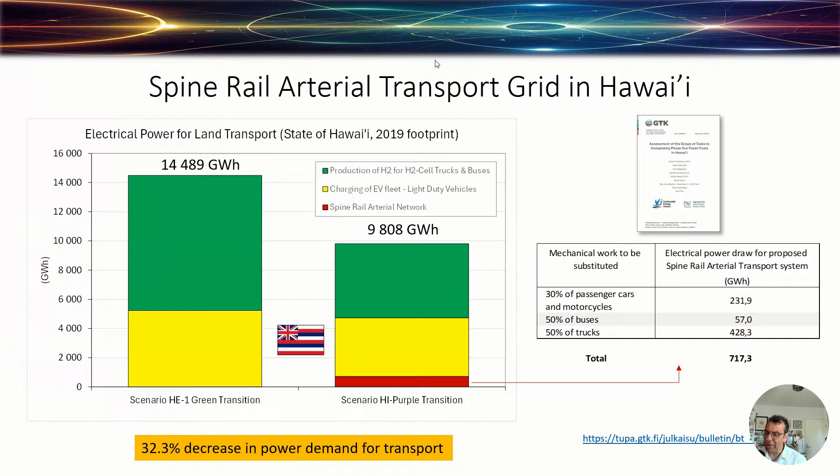You've got two systems that are completely independent: the shipping containers can move with impunity in any direction, and the monorails can move in any direction. So along the same route, heavy transport does not interact with people at all.

What's also interesting is I was studying things like electric vehicles and hydrogen fuel cells. Toyota contacted me in 2021 and we had a discussion - they've developed a few more things, one of which is the water engine. I'm very interested in this because it resembles, I don't know if it's the same thing or not, an inventor called Stanley Meyer who a couple of decades ago invented a water cell car where we take water and split it into hydrogen and oxygen, and then you use it.

It was revolutionary at the time, but then it all sort of disappeared. Toyota has now come out and said they're going to do the same thing in production. If this works, then that's our transport - that solves a lot of problems. Of course it will need desalinated water, very, very clean water for that to work, for the same reason a hydrogen fuel cell needs clean water. But as it so happens, we're desalinating lots of water.

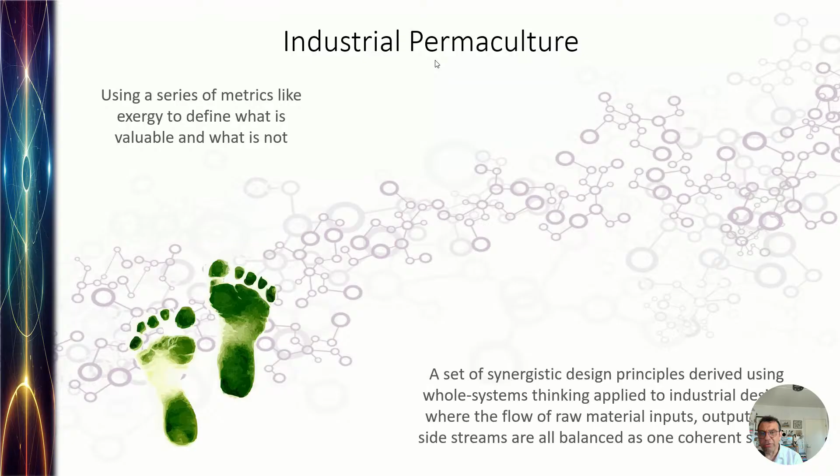So this is the constellation of pilot scale industrial sites. We've already talked about this. The waste products of each process plant could be valorized and used as input feedstock for another process plant, networked together like an organic self-sufficient farm, producing a small number of strategically useful products. We're not going to do this for everything, that's impossible, but could we do it for a small number of things that will empower everything else? So the principles of the circular economy, supported by abundant, cheap energy and industrial heat in a localized, self-sufficient grid, is the target I'm aiming for.

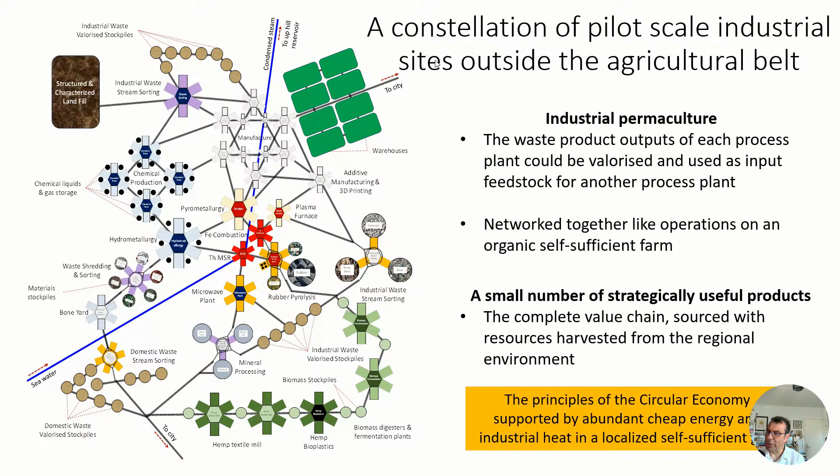So a couple of examples. Recycling rubber tires into diesel fuel. What I haven't talked about yet is mine sites. The mine site that we're hoping to sell electrical power to, every mine site in the world has a pile of spent truck tires. These tires are huge, 4 or 5 meters in diameter. When they wear out, they just put them in a pile and they get landfilled later. It's like every mine site has a pile of tires they don't know what to do with. So if we develop a mobile shredding plant that can go out to mine sites, the problem is handling them, you've got to handle them and move them around. They're so ungainly, but if we're set up for it, it'll work.

So if we can take the tires, debead them, cut them into manageable bits and shred them, put the shredded material into a shipping container, and then truck it, fueled by diesel fuel that we will later make, back to our site, put it into a pyrolysis plant. About 30% is solid char, which is your carbon black, which later can become graphene and carbon fiber. About 10 to 20% is syngas, and then you've got steel scrap and a fuel oil. That fuel oil, using heat from the thorium molten salt unit, which is very cheap heat, goes into a fractional distillation plant, and you end up with diesel fuel. And so we run back and forth and back and forth.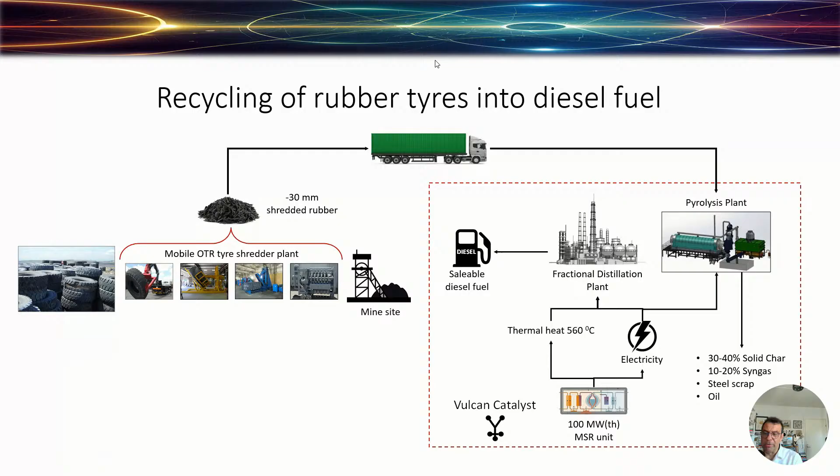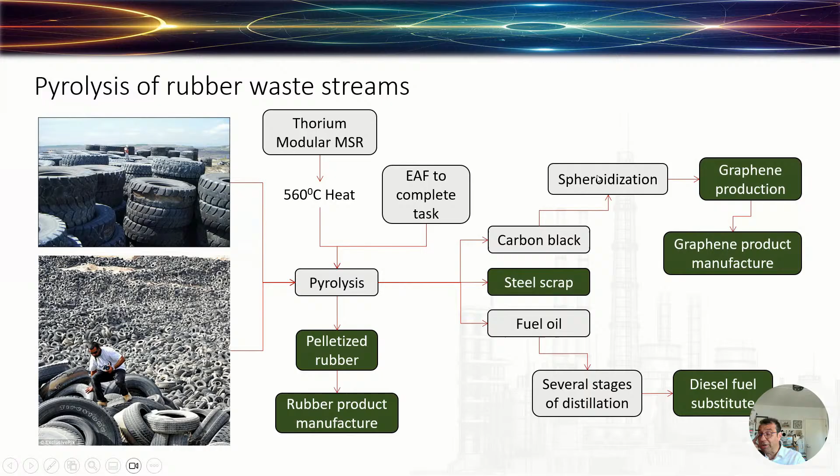Because we have cheap diesel fuel for transport and cheap electricity and heat, this becomes quite viable. And so it looks something like this. So here's your map. You've got pyrolysis coming from your thorium systems. You've got pelletized rubber, which can be turned into rubber products. Steel scrap, which, well, that's not that valuable, but we'll see. There's your fuel, diesel fuel substitute, which is saleable. Take your carbon black, spheroidize it, and you can make carbon fiber and graphene. If you put that with a 3D printer capability, we can make graphene product manufacture. Syngas - take human sewage, put it in the pyrolysis system, turn it into cooking gas for the city.

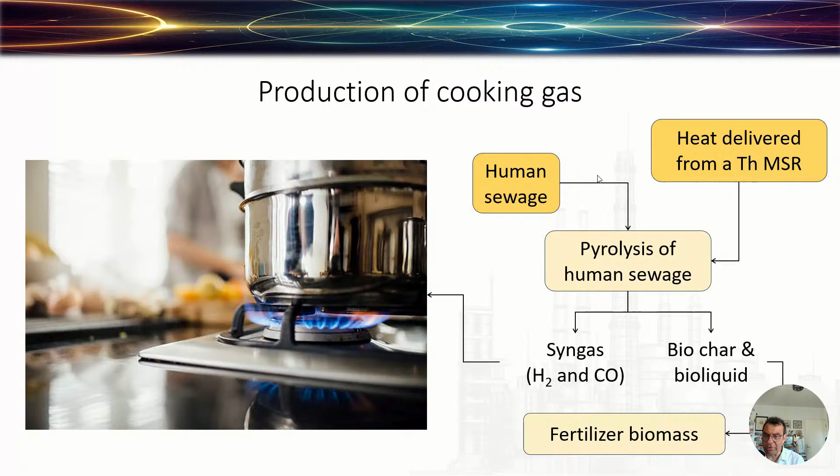Now, this is an interesting one - microwaving rocks. The European Space Agency wanted a source of water and oxygen on the moon, and so what they've developed is bombarding rocks with microwaves for an extended period of time, on the order of 40 minutes. The rock's atomic structure breaks down, and the oxygen in the lattice breaks apart, and pure oxygen comes off the system.

So what we're harnessing here is when you put, say, aluminium foil in the microwave, it sparks. That's what we're harnessing. And it turns out sulfur in particular has a way of accelerating this. So you end up with globules of metal, because if the rock is 40% oxygen and we take the oxygen away, it breaks down and forms metal globules. So this system being developed uses about as much electricity as a hairdryer, and they plan to run it off a solar panel on the moon, which is interesting, which means if we've got plenty of electricity on the ground, well, we can then start making metals.

So if we take basalt, a rock, any rock, it's about 30-40% oxygen, depending on the mineralogy. And what seems to be happening is these globules of metal are forming, and they are pure titanium, pure silicon, pure aluminium. Now, the Space Agency, European Space Agency, is interested in the oxygen. I'm interested in the metal. Of course, the oxygen, well, we can use to either roll back some of the dead zones in the ocean, or we can sell it to the space industry as a fuel.

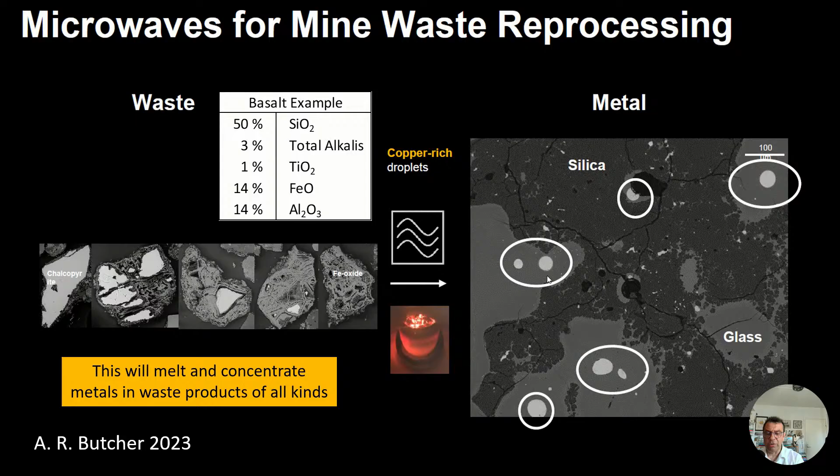Imagine, if you will, the following. Go out to a place, an industrial site that has a lot of waste problems, like a smelter. There's a smelter in the north of South America that's one of the most polluted places on Earth.

Get paid to take their industrial waste away, and use that to offset running costs. Put that material into a microwave system to break it down.

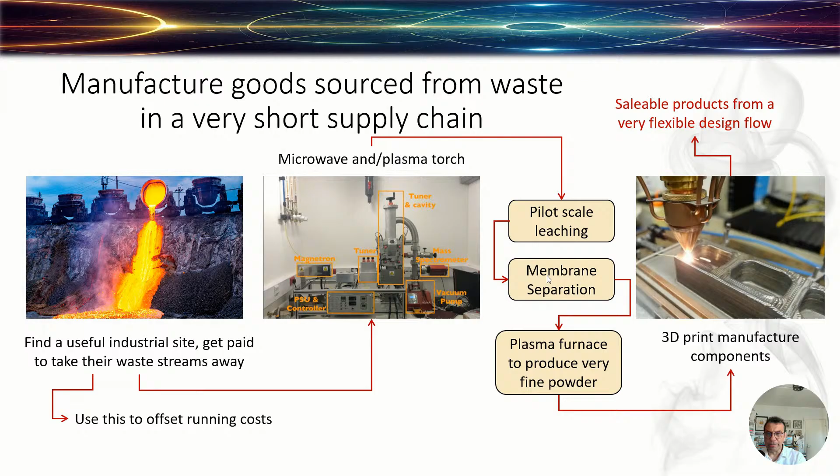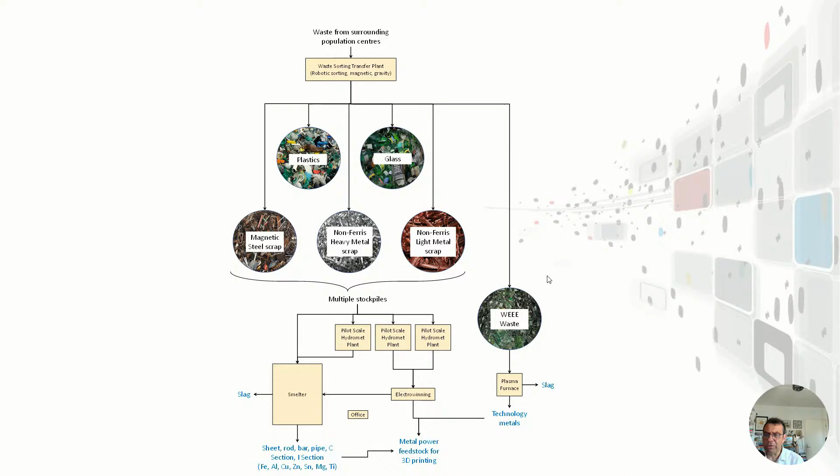Well, it'll be interesting to see if we can get that working. Around the site, we're talking about making a series of stockpiles. We'll have a waste sorting transfer plant, sort them in, and then use things - it'll look something like that. If we've got access to a smelter, we've got things like bottom ash and fly ash, smelter slag, shredded rubber. It's all useful - this is circular economy stuff.

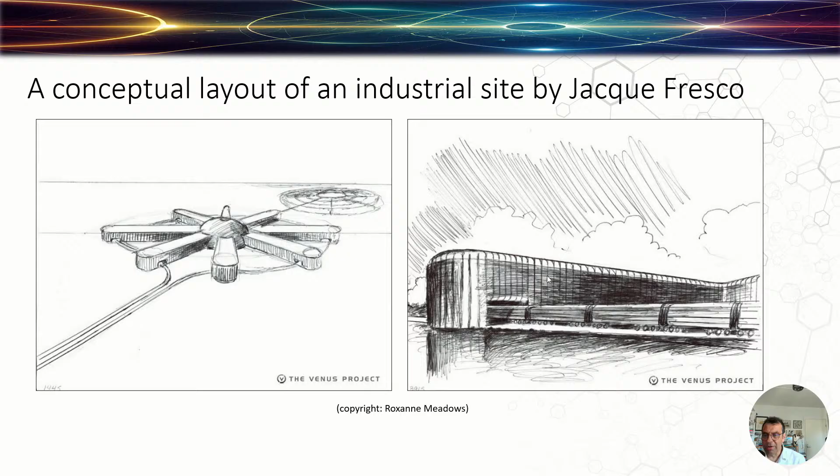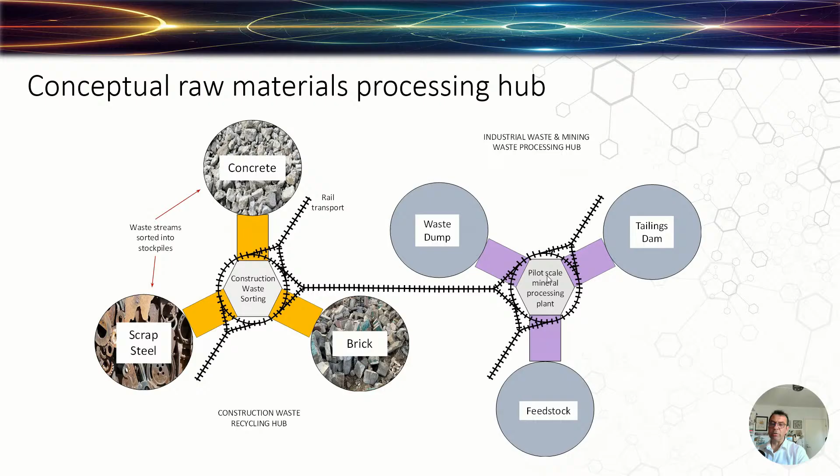So back to Jacque Fresco and the Venus Project. Jacques came up with the idea that if you had multiple industrial systems operating, but the products from each one were useful, and they all came together in a central hub for final products, connected by a rail system. So I took that idea and started designing the industrial constellation.

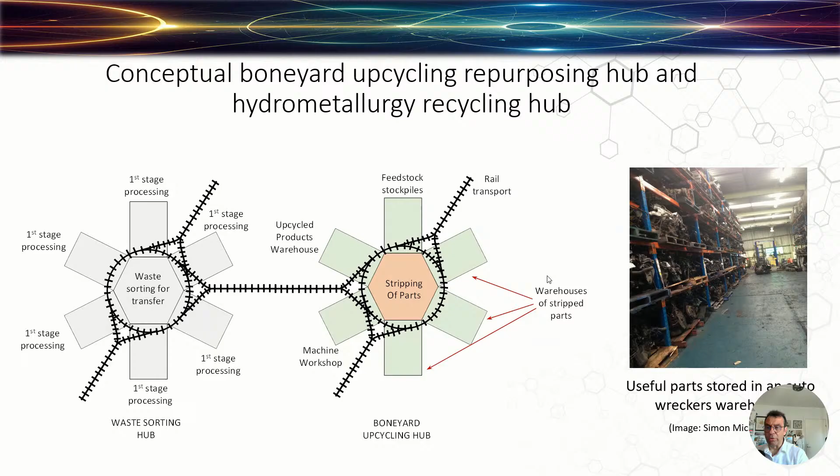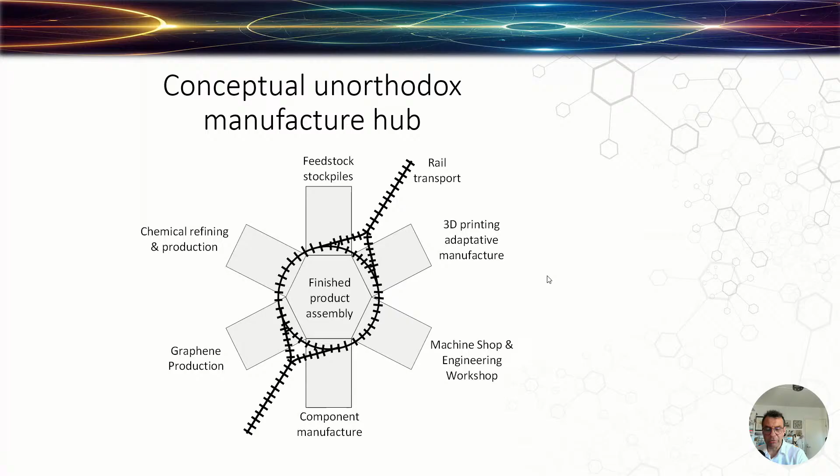I like the idea of taking waste and stripping useful parts out of it, then feeding those useful parts into a machine shop to make new things. So the boneyard comes back - sorting of waste, this is where I used to do my professional career years ago. And then feed it all into manufacture, but using high-tech, 3D adaptive manufacturing, a machine shop, component manufacture.

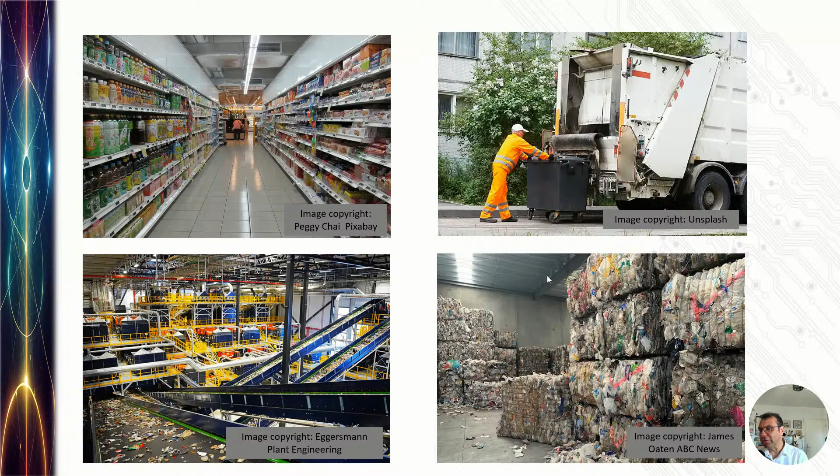I'm going to use that basic model here. So what we're looking at is the flow of materials. The current world, with the fourth industrial revolution, wants the surveillance of the individual in their own home. I do not agree with that. We can do this without surveillance of the individual at all.

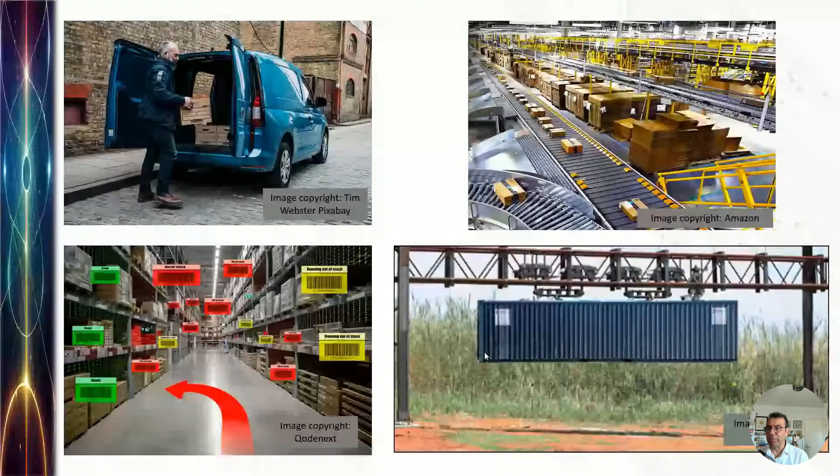So what we're talking about here is the local supermarket. What's the stock take? What materials are being bought and consumed by people? What waste is collected, sorted, turned into stuff? And then on the other side, when we manufacture stuff and send it back, how do we move it around? So we're actually tracking and tracing resources as they flow through industrial assets without tracking people. The key to this is the spine rail arterial system to move stuff around.

We want it to be working in harmony with the environment, so we need a new perception of what the environment is to us at a social contract scale. Food production is key here - if food production merges with natural biosystems, all part of the same system, but we're phasing out petrochemical fertilizers, herbicides, and pesticides - no glyphosate, wipe it out. By doing that, our relationship with the environment will change.

This whole presentation could be geared from this point, but this is an energy presentation. So what we want to do is take land that is barren at the moment with no water and arid soil, develop biosystems, and then in some areas start developing food. We'll source our own fresh water as much as needed for food production, so regardless of drought or climate or demands on local water resources, we can do this.

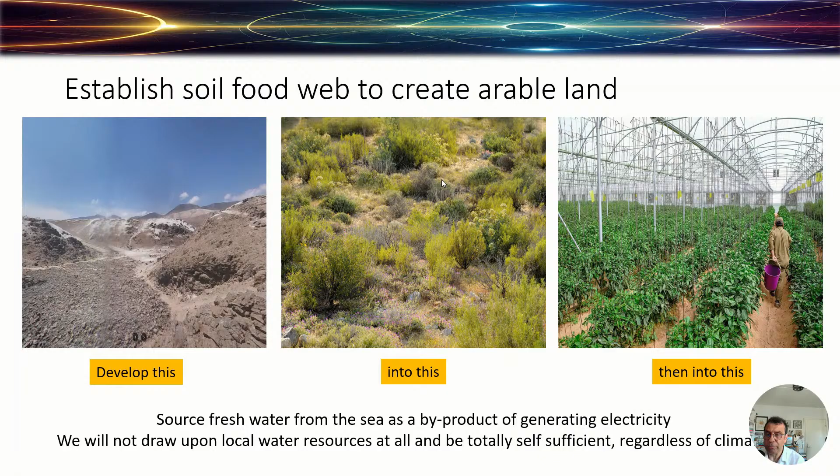To finish up, we want to build a gateway to a world worth living in and leaving to our grandchildren. We face a challenging future. We have a choice to complain about the situation or work towards a solution.